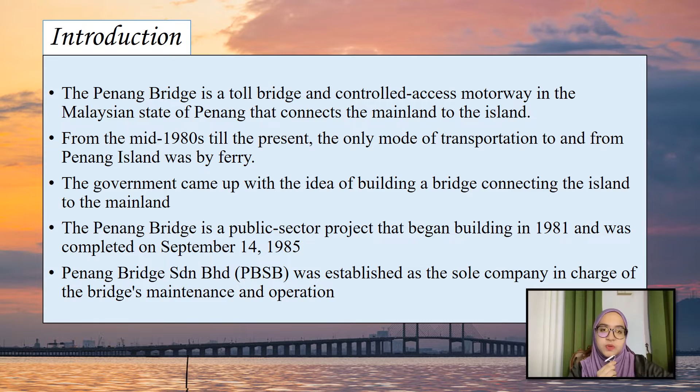The main purpose of the first Penang Bridge is building a toll bridge and control access expressway in the Malaysian state of Penang. This is the primary goal of the Penang Bridge construction project, which spans 13.5 kilometers and includes dual lane carriageways and control access lanes.

Prior to the opening of the Penang Bridge, mainland residents could only access the island via ferry, which took a long time due to having to take public transportation. In addition to traversing the Penang Strait, the bridge connects Seberang Perai on the mainland with Gelugor on the island of Penang. The bridge serves as the peninsula's first and only automobile link to the island connecting to the mainland.

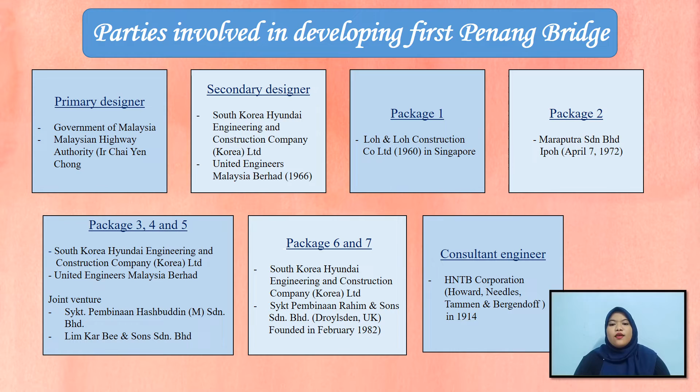Last but not least, HNTB is a consultant engineering firm for the construction of the Penang Bridge. HNTB Corporation is an American infrastructure design company that was founded in 1914.

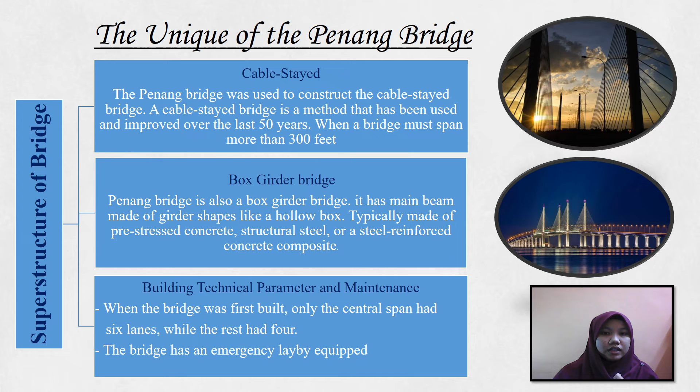The Penang Bridge location is located in a very strategic place, in a stable region outside the earthquake belt. Usually, the decision to choose the location is made by the contractor and subcontractor. The contractor needs to choose the project location site very wisely to avoid additional costs to the construction project and also for the safety of the workers and contractors during the project.

The selection of the project site area is an agreement between the contractor and the customer after examining various factors such as safety, area suitability, and construction cost. Due to the construction of this bridge, being one of the longest bridge constructions and requiring high construction costs, the selection of the area is very much emphasized by the contractor. The person responsible for designing and choosing the location of the Penang Bridge is Tan Sri Professor Chin Fung Kee.

The Penang Bridge construction area is also protected from the southwest monsoon winds, which can facilitate construction and maintenance work to be done more safely, ensuring road users and construction workers are safe. Apart from that, the Penang Bridge construction is also safe from submarine volcano routes, which can also ensure the safety of workers.

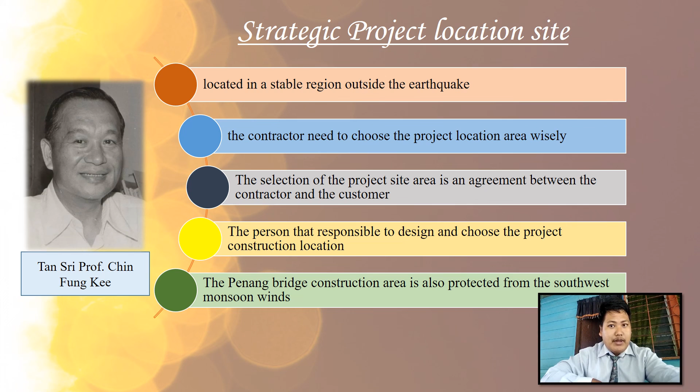In addition, the strong bedrock in Penang can withstand moderate to strong earthquakes around 7.0 on the Richter scale. That is all for me.

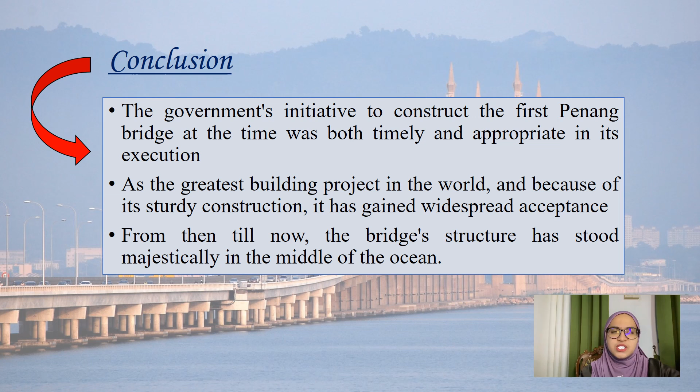Thank you. And for the conclusion, the government's initiative to construct the first Penang Bridge at the time was both timely and appropriate in execution. As one of the greatest building projects in the world, and because of its sturdy construction, it has gained widespread acceptance from people. From then till now, the bridge structure has stood majestically in the middle of the ocean.